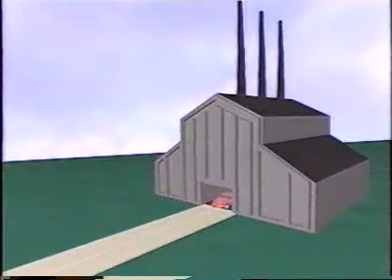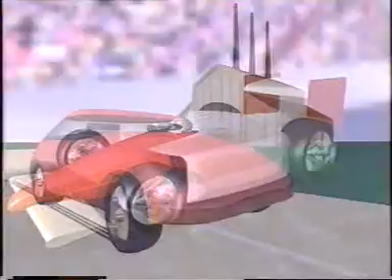At ambient temperatures and without a corrosive environment, the life of a metal component in steady-state conditions may be unlimited, provided operating loads do not exceed the yield strength or fatigue limit of the specific metal and wear is not serious. But change just one condition, the temperature, and we have a different story. At elevated temperatures with a steady or fluctuating stress, the life of the same metal component is limited.

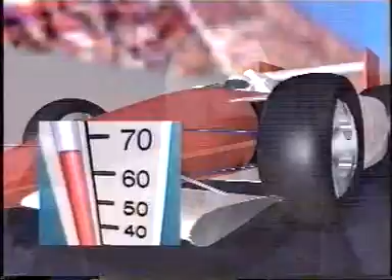At elevated temperatures, stress produces a condition of continuous strain. This is called creep. By definition, creep is time-dependent strain causing distortion. It occurs under stress. And after a period of time, the creep generated by elevated temperature may terminate in fracture by stress rupture, also known as creep rupture.

Since the conditions under which creep and stress rupture occur depend also on the alloy, the magnitude of stress, and duration of time, elevated temperature failures can occur over a wide range of temperatures. For a given metal, elevated temperature is frequently considered to begin at a temperature equal to approximately 1/3 to 1/2 its melting point, measured on the absolute temperature scale.

However, this rule of thumb does not always hold true. Actually, the temperature at which the mechanical strength of a metal becomes limited by creep rather than by elastic limit must be determined individually for each metal or alloy.

Types of elevated temperature failures. The principal types of elevated temperature failures are creep and stress rupture. There is also low and high cycle fatigue, thermal fatigue, and tension overload. Failures can, however, be caused by combinations of these conditions if they are modified by the environment.

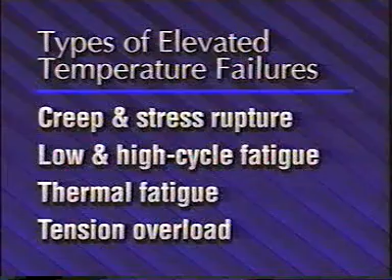As a rule, the type of failure is established by examination of the fracture surfaces and by comparing the operating conditions with available data on elevated temperature fractures. This analysis is usually sufficient for failure investigations. But when the operating conditions have caused a change in the metallurgical structure of the failed component, and it is possible that parts have been subjected to elevated temperatures, a more thorough analysis may be required.

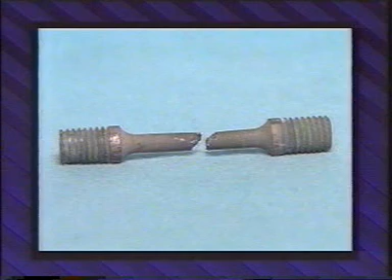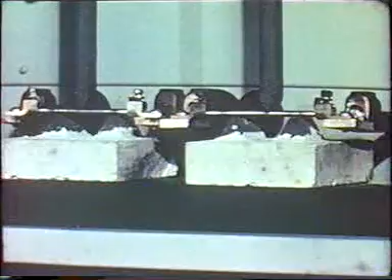Most elevated temperature tests are accomplished by tension testing. However, in-service failures can occur not only by tension, but by bending, torsion, and compression types of loading as well. In many applications at elevated temperatures, distortion is also a serious problem. Creep can cause failure when a part under steady load has deformed or distorted so that it can no longer perform its intended function.

The creep that occurs at any particular temperature generally shows 3 distinct stages, and these stages can be seen by plotting curves to show the percent of strain over time. There is first an elastic strain on the part or component. This is the immediate effect of the initial load. Following this initial elastic strain, there is a region of increasing plastic flow at a decreasing strain rate. This is the first stage of creep, the region called primary creep.

Following the primary stage, there is a region of fairly constant strain rate. This is the second stage, the secondary or steady state creep. Finally, there is a region of drastically increased strain rate. This rapidly extends to fracture. This is the third stage or tertiary creep.

The first stage of primary creep can be explained as an adjustment within the metal which occurs in the first few moments after the initial loading. Under this initial loading, the crystallographic imperfections begin to undergo realignment and the creep rate decreases. This leads to secondary creep. Second stage creep is an equilibrium condition between the mechanisms of work hardening and recovery. It is characterized by a constant but usually a relatively low creep rate.

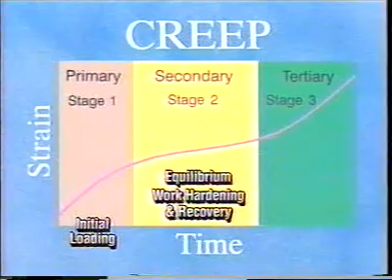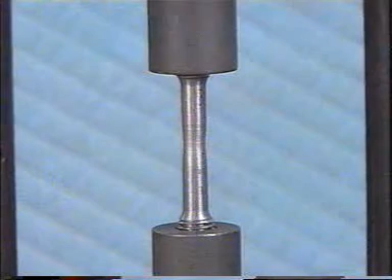Tertiary creep is the third and final stage of creep. The rate of extension increases and is followed by fracture. Tertiary creep occurs when the cross-sectional area of the metal decreases by necking or cracking, or both, and the creep rate accelerates. This creep rate will be increased by any environmental conditions that decrease the cross-sectional area.

Tertiary creep may also result from metallurgical changes, such as recrystallization under load. Recrystallization promotes rapid deformation, accompanied by work hardening that is insufficient to retard the increased flow of metal. It is this rapidly increasing deformation that serves as a warning of fracture soon to occur.

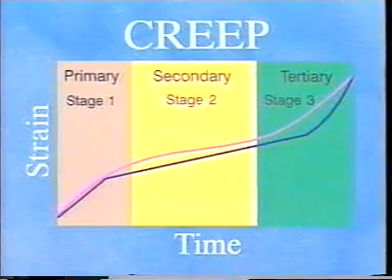Sometimes metals do not exhibit all three stages of creep. For example, under conditions of high stress or high temperatures, the absence of primary creep is not uncommon. Upon initial loading, second stage creep or even third stage creep can begin immediately. At the other extreme, notably in cast alloys, only minimal third stage creep may be observed. Fracture may occur with minimum extension.

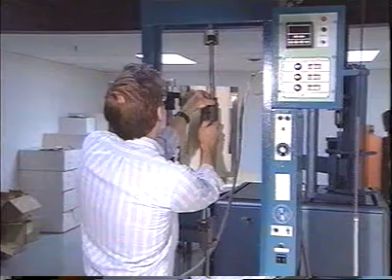A component subjected to creep loading in tension, torsion, or bending, or any combination of mechanisms, will eventually fracture, provided the strain occurring during creep does not relieve the stress. Stress rupture tests. Stress rupture tests are similar to creep tests. The difference is that the stress is often higher, the specimen may be notched, the test is much shorter in duration, and the principal information sought is the time to failure.

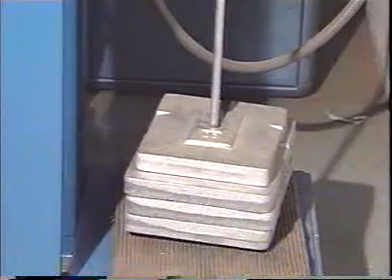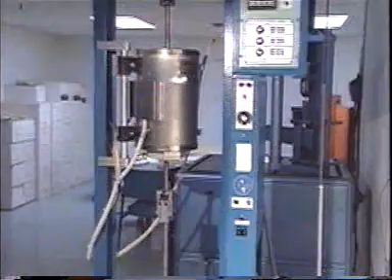Creep tests may last for months or even years, depending on the stress and temperature. Stress rupture tests generally last from about 200 hours to 2,000 hours. AMS specifications use higher temperatures and higher loads to obtain test times in the 24 to 48 hour range. Usually during a stress rupture test, the only data recorded are stress, temperature, time to fracture, and total strain.

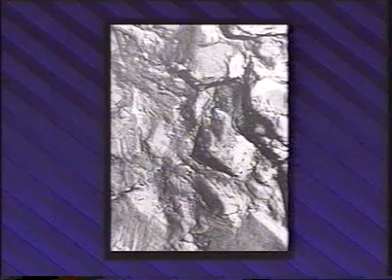Depending on the alloy, the fracture by stress rupture may appear macroscopically as either ductile or brittle. Ductile fractures are transgranular and are typically accompanied by more pronounced distortion. A brittle fracture is usually intergranular and occurs with very little distortion. Intergranular cracking may not be readily discernible on the surface of a brittle stress rupture fracture.

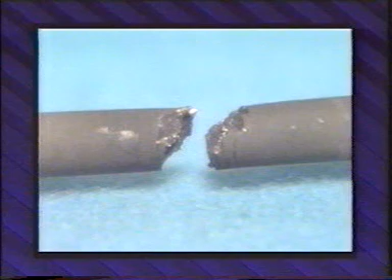If the oxide is removed, the mode of cracking will usually be visible. The cracking mode is usually revealed in a polished longitudinal section. The cracking will frequently be seen below the fracture surface and parallel to the fracture surface. In fractographs, some stress rupture fractures exhibit both transgranular and intergranular fracture paths.

In these instances, it is usually found that the transgranular fracture was initiated by a prior intergranular crack. The intergranular crack decreased the cross-sectional area and raised the stress. In general, brittle intergranular fractures are promoted by lower creep rates, longer rupture times, or higher temperatures.

Other significant microstructural features are also associated with stress rupture fracture. When intergranular cracking occurs, the crack paths not only follow the grain boundaries at and beneath the fracture surfaces, the grains also appear equiaxed, even after considerable plastic deformation and total elongation. In contrast, transgranular fracture frequently exhibits severely elongated grains in the vicinity of the fracture.

In tensile testing, the two common measures of ductility in the fracture are elongation and reduction of area. In stress rupture testing, the primary measures are true elongation at the end of the second stage creep and total elongation after failure. Despite some difficulties in the interpretation of ductility data, common practice is to plot elongation versus rupture life.

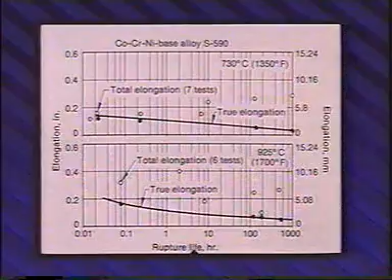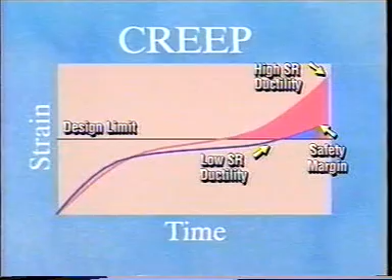Stress rupture ductility is an important factor in alloy selection. In conventionally cast nickel-base heat-resisting alloys, for example, a stress rupture ductility of about 1% is common at 1400 degrees. The strongest wrought heat-resisting alloys have a stress rupture ductility of over 5%. Because component designs are frequently based on 1% creep, a low stress rupture ductility may preclude the use of an alloy to its full strength potential.

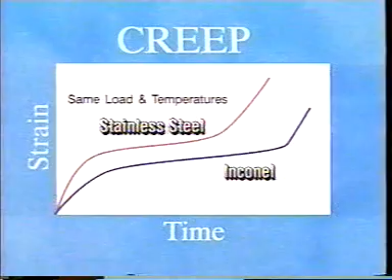The schematic creep curves for two alloys subjected to the same load and temperature conditions indicate that the higher rupture ductility means a higher safety margin. Premature failures have resulted from lack of ductility during stage 3. There is little warning of imminent fracture. In the design of components for service at elevated temperature, both strength and stress rupture ductility must be considered. Normally, these properties are determined quantitatively by smooth bar stress rupture tests.

In most real-world service applications, components are subjected to complex stresses. These stresses include stress concentrations arising from inherent flaws in the metal as well as from design, and smooth bar tests do not account for these stress conditions. Fortunately, these conditions can be partly reproduced in the laboratory by the notched bar test. Notched bar stress rupture tests are of principal interest because the results show the relationship between stress rupture ductility and the ratio of notched bar to smooth bar stress rupture strength.

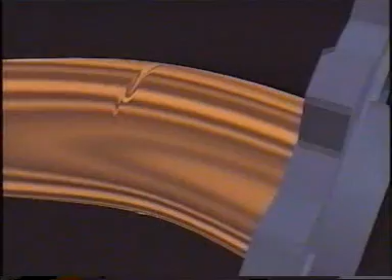Fatigue at elevated temperatures. In service, the steady loads or stresses to which components are subjected are often accompanied by mechanically induced cyclic loads. These cyclic loads are responsible for failure by fatigue. However, the precise relationship between temperature and fatigue strength varies widely, depending on the alloy, the temperature to which it is subjected, and the duration of the peak load.

When parts and assemblies are loaded in combined steady state and vibratory loading, their fatigue behavior is complex. The anticipated life of a part subjected to simple creep loading at elevated temperatures decreases. The life of parts subjected to combined creep and fatigue loads decreases substantially. This effect must be considered in design and in failure analysis.

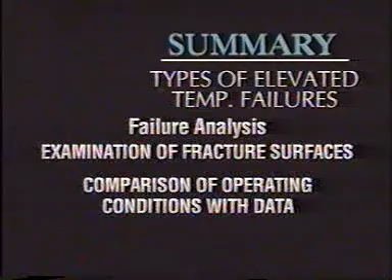Summary: types of elevated temperature failures. At elevated temperatures, stress produces a condition of continuous strain, creep. Principal types of failure are creep, stress rupture, low and high cycle fatigue, thermal fatigue, and overload. Type of failure is established by examination of fracture surfaces and by comparing operating conditions with available data on elevated temperature fractures.

Creep occurs in 3 stages. Primary, the initial elastic strain. Secondary, the region of constant strain. And tertiary, increased strain extending to fracture. Fracture by stress rupture may appear as either ductile or brittle.

Thermal fatigue. Mechanical conditions are not the only sources of cyclic loading that can cause fatigue failure. The cyclic effects of elevated temperatures can cause thermal fatigue. Temporary localized thermal gradients within a component can induce plastic strains. If these thermal gradients are applied repeatedly, the resulting cyclic strain can induce failure.

The cracks caused by thermal fatigue usually initiate at the surface. They originate perpendicular to the surface and may occur singly or in multiples. The cracks then gradually propagate inward, usually progressing transgranularly. Because thermal fatigue cracks initiate externally, the amount of corrosion or oxidation varies along the fracture surface. The amount of corrosion or oxidation is inversely proportional to the depth of the crack. Oxidation in stress rupture cracks is more uniform.

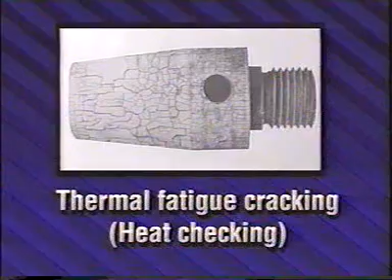Excessive creep produces considerable distortion and numerous subsurface cracks. Thermal fatigue, on the other hand, produces little or no distortion and relatively few surface-oriented cracks. Typically, fracture surfaces of components cracked in stress rupture are irregular and discontinuous. In contrast, thermal fatigue fractures exhibit relatively flat, continuous surfaces.

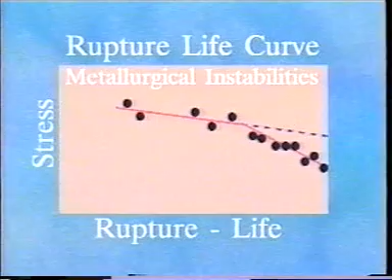During service, the metallurgical structure of a part may be changed by the action of stress, time, temperature, and environment. The result is a change of strength. These changes are called metallurgical instabilities. The instabilities are indicated on the rupture life curve by a sharp change of slope. Sources of instabilities include transgranular-intergranular fracture transition and aging or overaging. This involves precipitation or decomposition of carbides, borides, or nitrides.

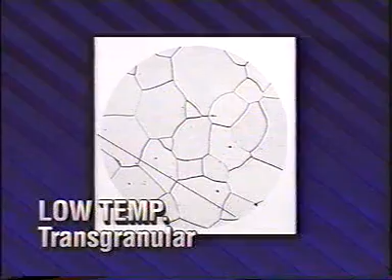The principal metallurgical factor in stress rupture behavior is the transition from transgranular fracture to intergranular fracture. The temperature at which the transition occurs is called the equicohesive temperature, or ECT. The transition occurs because the properties of grain boundary regions differ from those of grains. At low temperatures, the grain boundary regions are stronger than grains. Therefore, deformation and fracture are transgranular. At higher temperatures, the grain boundaries are weaker than grains, so deformation and fracture are largely intergranular. The transition from transgranular to intergranular fracture occurs at the equicohesive temperature.

The age-hardening alloys, which include certain stainless steels, aluminum, and heat-resisting alloys, among many others, are characteristically unstable when in a state of transition to the equilibrium condition. Under creep conditions, these age-hardening alloys usually continue to age with temperature-induced and stress-induced atomic migration. The result is reduced strength. At elevated temperature with stress, the submicroscopic precipitate tends to grow into a discrete phase large enough to become visible. The strains in the crystal lattice are minimized and the strength of the alloy decreases.

The effects of environment. Environment and the interactions between surface and environment have a marked effect on the behavior of metals at elevated temperatures. In fact, the most common source of elevated temperature failure requiring premature replacement of a component is the environmental degradation of material. Environmental degradation of material causes far more elevated temperature failures than creep and stress rupture. In most elevated temperature applications, control of environment is essential, or the materials must be protected by coatings or self-protective oxides.

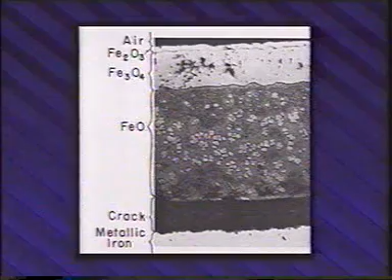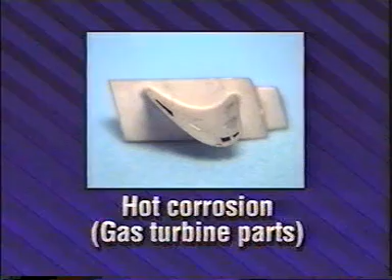Oxidation and all other reactions of metals with gaseous environments have long been recognized as a severe limitation to the utilization of metals at high temperatures. Therefore, the development of alloys for use at elevated temperatures is usually directed not only to improving the mechanical properties, but improving their resistance to hot corrosion as well. The alloys used in the hot sections of gas turbine engines are normally exposed to environments that promote corrosion and corrosion erosion. Consequently, these alloys are selected for high strength and resistance to surface degradation.

But as the designs of gas turbine engines are constantly changed to improve efficiency, the gas and metal temperatures are necessarily increased. Maximum temperatures, however, are limited primarily by the high temperature strength of the alloys used for turbine applications. Hot corrosion is one of the most serious problems with gas turbine engines, boilers, oil-fired furnaces, and other units operating at elevated temperatures.

Hot corrosion is accelerated by the presence of sodium chloride and sodium sulfate, which are usually present when assemblies are operated near seawater. The main sources of sodium compounds are the sea salt in the air and the fuel used in the engine. Salt-containing atmospheres at elevated temperatures have a universally corrosive effect on almost all metals, steel, stainless steels, heat-resisting alloys, and titanium included. As a rule, the adverse effects of salt increase as temperature increases.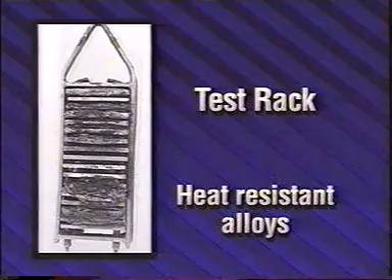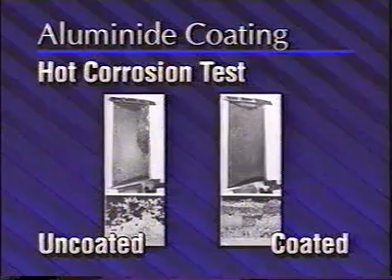Significant advances have been made in the development of alloys with better resistance to hot corrosion. Still, the most effective method of minimizing hot corrosion and preventing premature failure is the use of protective coatings. These coatings supplement the inherent corrosion resistance of most heat-resisting alloys. However, at best, they provide only a partial solution to the hot corrosion problem.

An uncoated turbine blade after 118 programmed cycles shows severe degradation by hot corrosion. The same nickel-base alloy with a nickel aluminum protective coating after accelerated hot corrosion testing in an engine is only slightly degraded. The aluminum-rich coatings, such as the aluminide coatings, successfully extend the life expectancies of gas turbine engine blades and vanes.

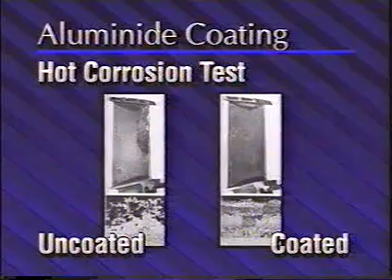Another class of high-temperature corrosion-resistant coatings is applied to surfaces as complex cobalt-base alloys. The coatings are applied by electron beam vapor deposition or low-pressure plasma spraying. Hot corrosion can also attack a coating in a localized area. A localized attack may be the result of variations in the chemical composition of the coatings. The attack can also be the result of corrodants concentrating in a localized area.

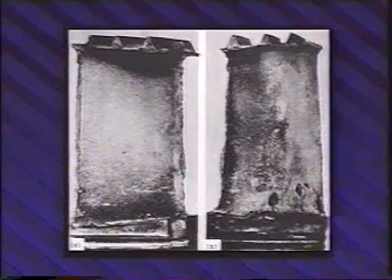It is also possible for corrosion-erosion degradation of the coating to occur at one specific location. A good example is the leading edge of a turbine blade, which is exposed to high-temperature, high-velocity gases in the turbine. Subsequently, the base metal is also attacked, requiring premature removal of the component from service.

In an oxidizing atmosphere, aluminide coatings form a protective aluminum oxide layer on the blade's surface. The cyclic operation of a gas turbine engine causes the oxide to spall off. Subsequently, the coating forms another protective layer of aluminum oxide. The process is called self-healing.

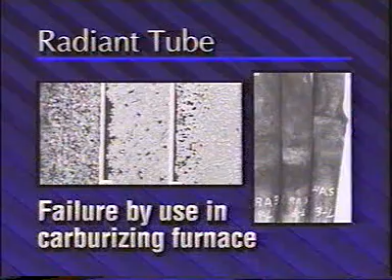Controlled carburization is the diffusion of carbon into the surface layers of steel. Controlled carburization is a widely used and useful heat treating process to develop high surface hardness in the steel. Uncontrolled, the carburization can be highly detrimental to components in service at elevated temperatures. Unwanted carburization is common to many industrial applications.

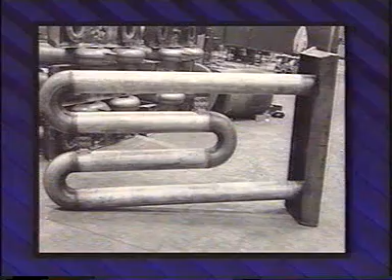With or without oxidation, the carburization takes place in resistance heating elements and various components and fixtures of heat-treating furnaces. Certain petrochemical plant components, such as heater tubes, may also be subjected to carburization or oxidation, or both. Both oxidation and carburization can be highly detrimental to components at elevated temperatures. The two processes generate volume changes that are non-uniform. These volume changes result in very high residual stresses within the part or component.

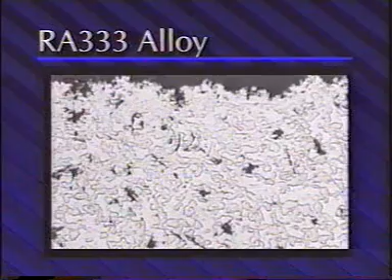In addition, there may be a loss of metal by corrosion erosion or embrittlement by the carbon pickup, which forms carbides. Ultimately, the corrosion or the corrosion erosion results in a loss of supporting thickness in the structural member. Carbide formation results in a loss of ductility and makes the component susceptible to brittle fracture. Heavy carburization also eliminates the possibility of repair welding.

In stainless steel, the diffusion of carbon results in the formation of additional carbides. Before the unwanted carburization, the microstructure of a stainless steel consists of small carbides restricted to the grain boundaries. In service, the same steel shows massive islands of carbides formed in the austenite matrix. Carburization of stainless steels also contributes to embrittlement.

A high volume of carbides produces an increased susceptibility to attack by oxidation. The attack occurs when metal surfaces are simultaneously or intermittently exposed to heavily carburizing and oxidizing environments. The condition is sometimes referred to as green rot because it creates a distinctive green surface condition. Under these conditions, the dual action of carburization and oxidation can weaken the metal. Oxidation attack occurs at the grain boundaries. The loss of grain boundary strength is followed by detachment of grains and subsequent erosion.

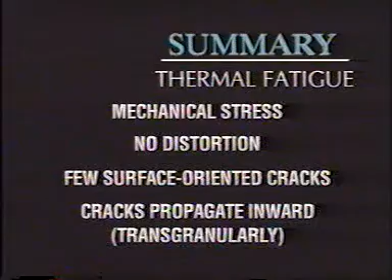Now, before we demonstrate how the various causes of elevated temperature failures are related to industrial applications, let's review and summarize. Thermal fatigue is caused by mechanical stress, brought on by uneven thermal and contraction stresses. Thermal fatigue produces little or no distortion and relatively few surface-oriented cracks. Cracks propagate inward, usually progressing transgranularly. The principal causes of failure at elevated temperature are oxidation, hot corrosion, and uncontrolled carburization. Hot corrosion is oxidation.

Elevated temperature failures in industrial applications. Gas turbine engine components are made of a variety of metals to accommodate operating temperatures ranging from ambient to above 2200 degrees Fahrenheit. Hot parts, such as burners, turbine blades, and vanes, are designed for high strength at elevated temperatures. Nevertheless, in all of these specially designed and alloyed parts, creep is a problem.

Rotating components can stretch, often beyond limits, causing them to make contact with nearby stationary components. The result is rubbing deformation and failure. Fatigue is a fairly common cause of cracking in turbine blades and vanes. Fractures originate from the highest stress locations or from critically located defects.

Fatigue fracture can also originate at notches caused by FOD, which is short for foreign object damage. FOD decreases the effective cross-sectional area, and the subsequent fracture is usually due to ductile tension overload. There have been instances of large jet engines swallowing small planes, foreign object damage in the extreme, perhaps. But birds and miscellaneous flying objects are a constant threat to jets.

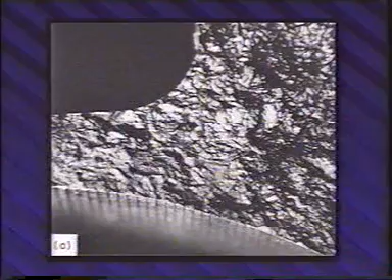Components of the burner section are susceptible to thermal fatigue cracking. Like fatigue cracking, thermal fatigue cracking also produces cracks that may be difficult to distinguish from those produced by creep and stress rupture. This is due to oxidation of the fracture. Among the other types of burner component failures encountered are distortion, extreme oxidation, and melting.

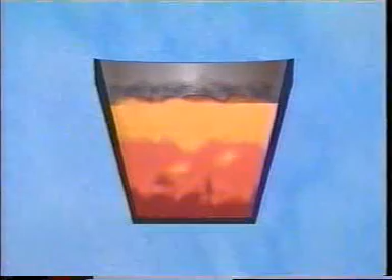Failure by liquid metal. Several kinds of elevated temperature failures can occur by contact with liquid metal. In general, liquid or molten metals used in coating other metals cannot be contained in vessels made from heat-resisting alloys. These coating metals include aluminum, zinc, and copper. Molten lead can also be used to coat metals, provided the lead bath for the coating is covered with a protective layer of powdered charcoal.

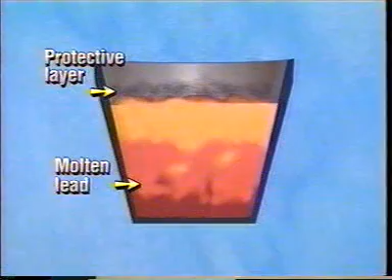When molten lead is not protected from air, a lead oxide forms, and this oxide is highly corrosive to most heat-resisting alloys. Among the alloys that have been used successfully to contain molten lead, however, are Inconel 600 and RA 333. Fracture associated with contact by liquid or molten metal is usually compounded by liquid metal embrittlement, which weakens the grain boundaries. For hot dip galvanizing, tanks that contain the molten zinc are commonly made from low-carbon steel plate, which normally provides acceptable life. Many steel parts are protected from atmospheric rusting by a thin electroplated cadmium layer.

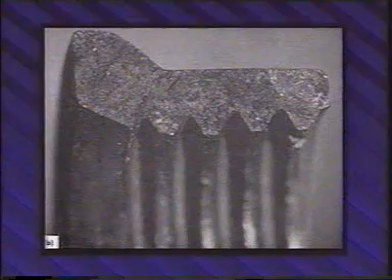However, if cadmium-plated parts are heated above 600 degrees Fahrenheit, as they are in welding, brazing, and soldering, the cadmium can penetrate the grain boundaries, and the result is cadmium embrittlement. A similar liquid metal embrittlement is caused by mercury and indium.

Failures of furnace parts. Among the parts subjected to the most severe service at elevated temperatures are the components and related fixtures used in heat-treating furnaces. The life of radiant tubes used in carburizing and carbonitriding furnaces generally varies from 6 to 20 months. Their life depends largely on their alloy composition, the composition of the fuel being burned, how the furnace is operated, whether it is cyclic or continuous, and the positioning of the burners.

One of the better proven alloys for radiant tubes in a carburizing or carbonitriding environment is a nickel base RA 333. The life of heat-resisting alloys in contact with molten salts is usually erratic. For example, thermocouple protection tubes under similar service conditions may survive 100 immersions before replacement is necessary. And then again, they may fail after only 5 or 10 immersions. The components exposed to molten salts usually fail by perforation or by structural disintegration.

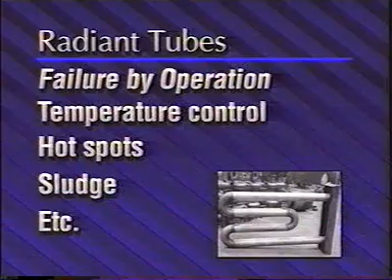Intergranular attack related to chromium depletion at the grain boundaries often contributes to the failure. Failure is sometimes related to variables in the operation of the furnace. For instance, the control of temperature may be lax. Hot spots can exist in the furnace, and sludge can accumulate, all of which may affect the components within the furnaces. The salt pots used in heat treating applications are also subject to erratic service.

When heat treating fixtures are subjected to temperatures above 1200 degrees Fahrenheit, they will have a limited life. As operating temperatures increase, their life shortens rapidly. Also, when fixtures are repeatedly quenched, their life expectancy is decreased even more. Fixtures usually fail by a combination of thermal fatigue, oxidation, carburization, and warping. With repetitive heating and cooling, fixtures always face the possibility of failure by thermal fatigue.

Trays and baskets and fixtures used for holding workpieces during carburizing or carbonitriding operations may become carburized and fail prematurely. One of the better alloys for such service is cast HT heat-resisting alloy. When subjected to both cyclic quenching and a carburizing atmosphere, the fixtures with heavier cross-sections are more likely to fail as a result of thermal fatigue than as a result of carburization.

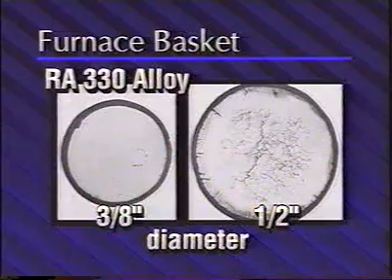Macrographs of RA 330 alloy bars taken from the same furnace basket show the effects of carburization. The smaller bar, 3/8 of an inch in diameter, shows no evidence of cracking. The half-inch bar exhibits severe cracking by thermal fatigue. Failure due to carburization generally occurs at room temperature, when the component embrittled by chromium carbide breaks as a result of impact or jarring. This type of fracture usually originates near the central portion of a fixture, basket, or tray.

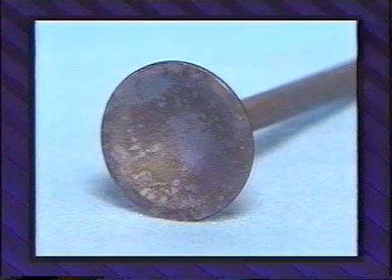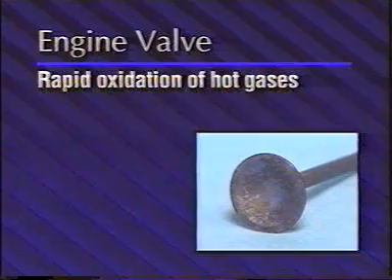Failures of engine exhaust valves. The exhaust valves of internal combustion engines are subjected to elevated temperatures along with high repetitive loads. Among the types of failures encountered in valves are those caused by the rapid oxidation of hot gases, fatigue, thermal fatigue, corrosion, erosion, overstressing, and combinations of these factors.

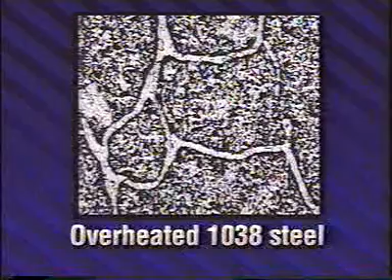Burning is the most common mode of valve failure. The burning results in large grain size and oxidation of the grain boundaries. The next most significant failure mode is fatigue. Fatigue generally occurs at the junction of the stem and head, the point where hot gases from the combustion process impinge on the valve stem during the exhaust cycle and create a notch effect. Temperatures in this area normally range from about 1350 to 1400 degrees Fahrenheit.

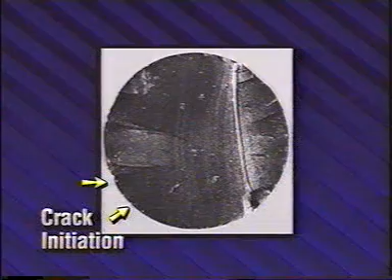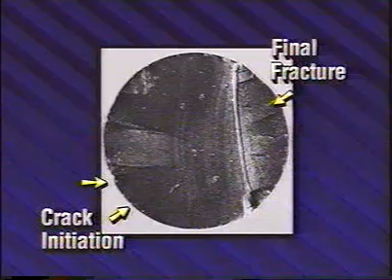Mechanical forces from firing pressure and valve spring pressure provide the stress for failure. The fracture surface of a typical valve stem failing by fatigue shows multiple crack initiation points. The crack propagated by fatigue through 3/4 of the stem before the final fast fracture occurred in a single cycle. The source of stress concentration was a geometric notch resulting from a crack caused by oxidation.

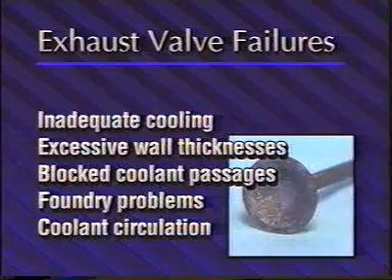It is possible that the failure of exhaust valves and many other parts may be caused by problems in other sections of the assembly. For example, exhaust valve failures sometimes result from inadequate cooling by the cylinder head. Excessive wall thicknesses, blocked coolant passages due to cracked cores and other foundry problems are usually located by sectioning the cylinder head. It is also worthwhile to determine if the coolant was circulating properly through the radiator, water pump, hoses, thermostat, and other parts of the cooling system. Problems in the cooling system particularly can affect other parts in the assembly.

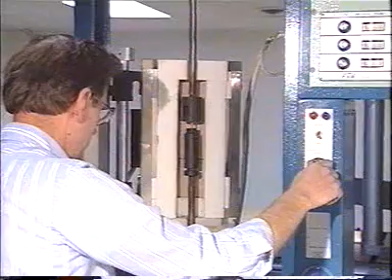Testing techniques. The investigation of failures at elevated temperatures, to a large extent, follows the general procedures for failure analysis. Much of the standard equipment can be used. There are some special testing techniques, however, and these are generally highly complex and specialized. Frequently, the only way to find an answer to the elevated temperature problems is by simulated service testing. Simulations are helpful in reconstructing failure under carefully controlled conditions. Many of these simulated service tests have been developed for solving the problems of gas turbines, which present some of the most rigorous high-temperature demands of any industry.

Magnetic tests are widely used for analysis of failures involving normally non-magnetic heat-resisting alloys and austenitic stainless steels. Many of these alloys become magnetic as a result of alloying element changes caused by oxidation or carburization, or both. Consequently, when nickel-containing alloys and austenitic stainless steels show evidence of magnetism, some insight into the possible causes of failure is provided.

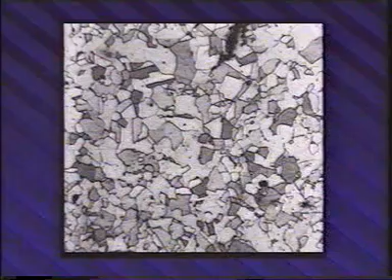Macro etching of cross-sections is another simple test. Macro etching is useful in detecting the cracks and voids characteristic of thermal fatigue failures. When thermal fatigue is severe, sectioning will reveal the characteristic signs. Metallographic examination is helpful in detecting microstructural changes and corrosion products associated with common modes of failure. Once detected, the microconstituents and corrosion products can then be identified more positively by chemical analysis, X-ray diffraction, or electron microprobe analysis.

Tests for low cycle thermal fatigue and creep can be conducted on the Ferris wheel disc. This testing apparatus subjects full-scale gas turbine engine discs to simulated low cycle fatigue conditions. A special type of non-destructive inspection is used to show the first indication of a crack.

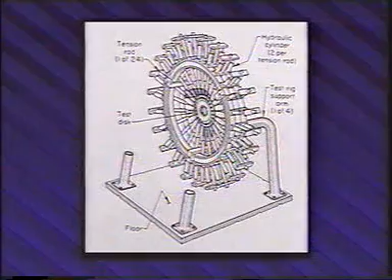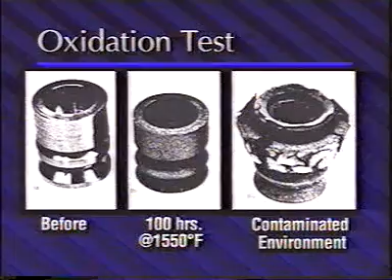Oxidation corrosion burner rigs have been developed to test turbine blade alloys and coatings. These test rigs are capable of testing 8 to 12 specimens under engine conditions at temperatures from 1450 to 2300 degrees Fahrenheit. The basic steady-state oxidation test simulates aircraft cruising conditions. Higher than cruising temperatures are obtainable to accelerate degradation. These are just a few of the tests available for detecting and simulating failures that can occur at elevated temperatures.

It should be said, however, that even though testing equipment to simulate conditions of elevated temperature service is necessarily sophisticated and specialized, the service conditions of elevated temperature applications, the basic causes of failure and fracture, are still much the same as those encountered at any temperature. In the analysis of these failures, however, we must take into account the fact that reactions between metal surfaces and their environments are accelerated at elevated temperatures, and this can result in a variety of special problems.

Elevated temperatures can cause a variety of metallurgical instabilities, and the problems caused by elevated temperatures are very real concerns in many industrial applications. Yet the major types of elevated temperature failure are relatively basic in failure analysis: creep, stress rupture, fatigue, thermal fatigue, distortion, carburization, and oxidation.